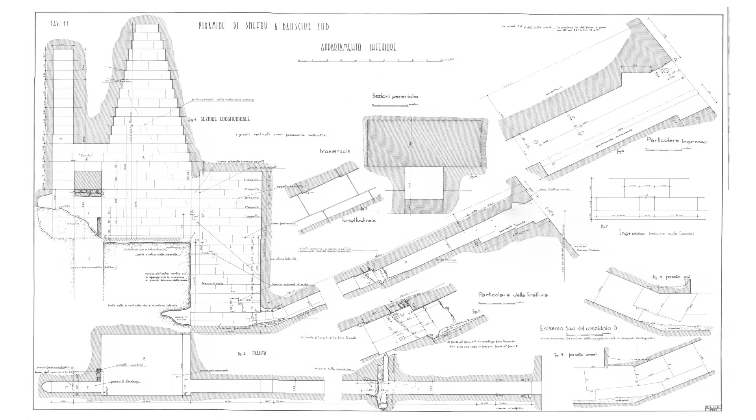Dear friends, so far I've released 5 videos dedicated to the construction of the Egyptian pyramids. In them, I've tried not only to draw your attention to the various interesting details of these ancient structures, but also to provide a rational explanation for them. Because in my opinion, all these details and nuances are important clues that can help us understand the logic of the ancient Egyptian builders.

At the same time, I believe that many researchers repeatedly make a very serious methodological error. They assume that the pyramid's strange internal structure and its elements can be explained in terms of symbolism or the religious beliefs of the ancient Egyptians. After all, once you allow yourself to attribute everything to religion and cults, you lose the opportunity to understand the true meaning of all these very unusual architectural solutions we see inside and outside the pyramids.

And in this video, I'll show you how much we can understand if we temporarily remove all these religious and symbolic meanings from our considerations, if we choose the rationality of the ancient builders as the starting point for our reasoning. This is very important because I am convinced that there could only be one logic that would have allowed all these enormous structures to be built. This is rational logic, based on centuries of experience, pragmatism, and the outstanding skill of the ancient builders. And stories about the flight of the pharaoh's soul to the stars have nothing to do with this logic.

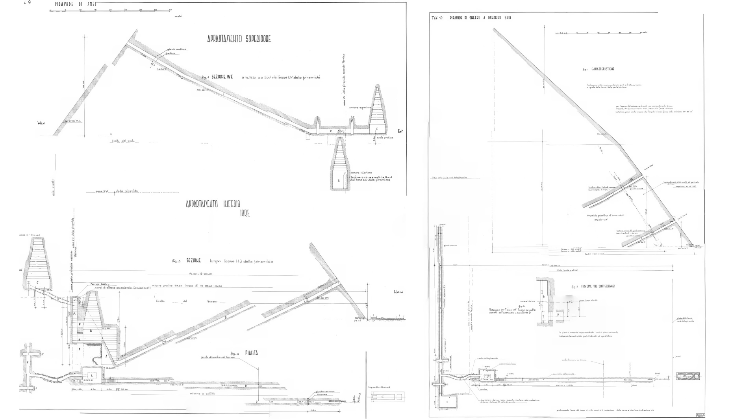But if this is true, then what is the real reason for this strange internal layout of the Egyptian pyramids, the likes of which you will find nowhere else? What motivated the ancient architects when they created such incomprehensible structures? What was the secret of the ancient builders that allowed them to go from the first step pyramid to the Great Pyramid of Khufu in just 100 years? I believe I know the right answer, and it's a perfectly rational one.

It's the method of lifting blocks. It's this method that made the pyramids what we know them as, and it's the reason for most of the strange regularities we observe in their internal structure. And what is very important, this can be proven. Because, unlike the illusory world of religious meanings and elusive interpretations, we have precise measurements, formal logic, physics, and mathematics at our disposal.

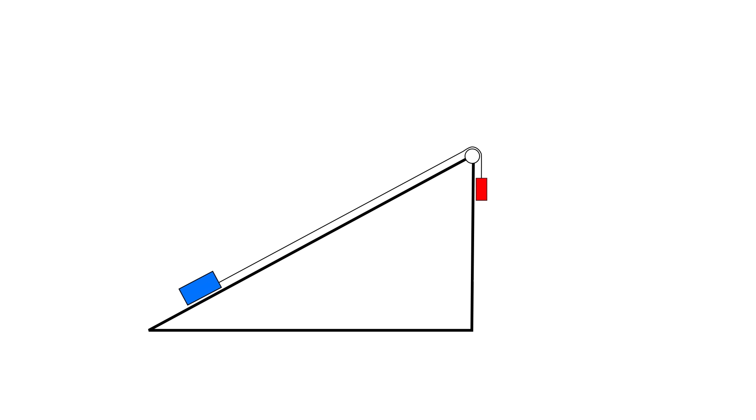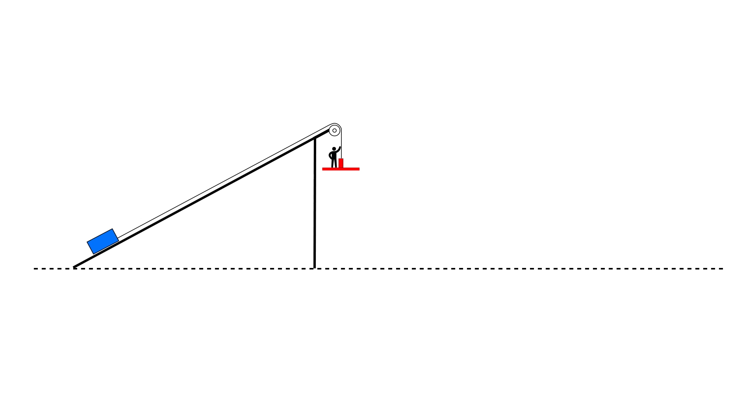As I mentioned in this video, there are many details inside and outside the pyramids that indicate their builders used the same basic principle for lifting building materials. Blocks were raised by lowering a counterweight. Moreover, what is very important is that people acted as this counterweight, since people are the only counterweight that can quickly rise back up on its own. It's a very simple and yet highly productive method, and to use it, you need 2 things: a large enough space for the platform to descend vertically and a ramp or staircase for people to climb back up.

And those who have had even the slightest interest in the Egyptian pyramids will immediately see something very familiar in this diagram. Indeed, this idea instantly provides a rational explanation for all those enormous pits we see on the sites of unfinished and dismantled pyramids. I'm sure these pits weren't created for religious reasons or simply to construct burial chambers. They played a vital role in the pyramid construction process. Platforms with counterweights were lowered into them, and the people who acted as this counterweight then walked up the ramp.

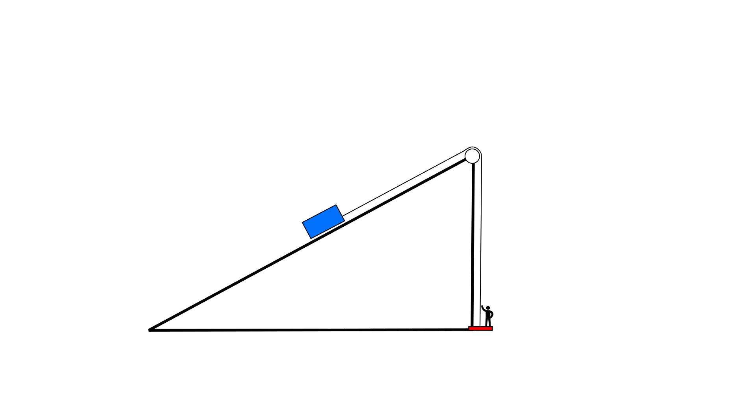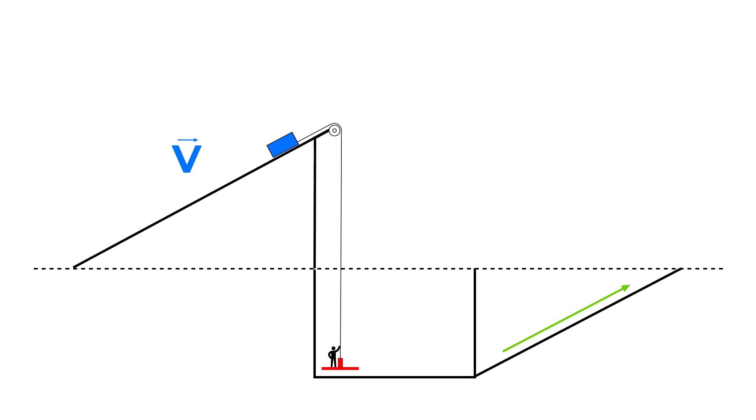We will not now dwell on the technical aspects of this method, which, incidentally, is still used in industrial mountaineering. This is a topic for a separate, serious discussion. However, I'd like to immediately highlight 2 of its main advantages. Firstly, it allows for a constant force to be applied throughout the entire lift, unlike any manual push-pull method, which is extremely important in terms of wear and tear on the ropes, of which a huge number were required. Second, this method allows for much greater load movement speeds than a manual winch. After all, lifting speed was critical for the construction of the Great Pyramids, which required moving millions of tons of blocks upward.

And this video will be the first in a series of videos in which we will explore in detail how this method was used by ancient builders, how it developed as the pyramids grew in size, and why it essentially determined the entire configuration of their internal structure. But first, it is very important for us to understand how this block lifting technology came about and how widely it was used by builders to solve various problems. You'll see now that this method will help us explain much not only inside the pyramids, but also around them, and that objects familiar to everyone from school may actually have a meaning quite different from what's commonly attributed to them.

Saqqara, the famous pyramid of Djoser, designed by the great Imhotep. This step pyramid is the first of the Egyptian pyramids. Beneath it, there is a huge shaft almost 30 meters deep, and the purpose of this shaft has long been a subject of debate among many renowned Egyptologists.

The main question, of course, is why was it left empty instead of filled with blocks? We see nothing similar in the subsequent pyramids. There's even a theory that it was cleared out many centuries after the pyramid's construction, which seems extremely unlikely to me given the volume of the shaft, which is several thousand cubic meters, and the main staircase is completely blocked.

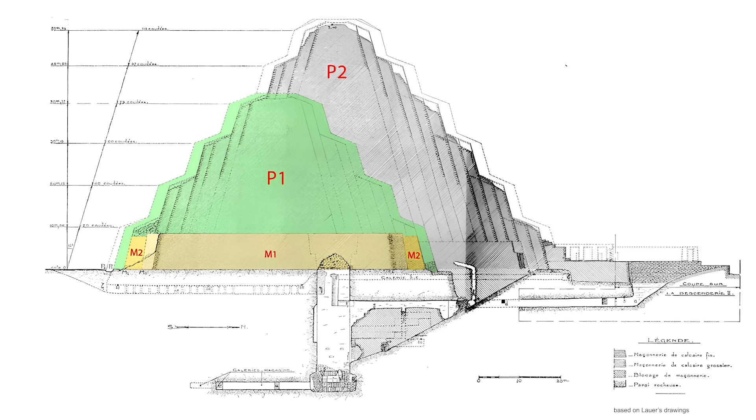Furthermore, researchers are completely baffled as to why the pyramid's creators didn't leave a layer of rock above the shaft, as shown in Keith Hamilton's drawing. This would have been much simpler in terms of the stability of the entire structure above. Instead, the shaft extended upward and passed through the central superstructure, as seen in this diagram.

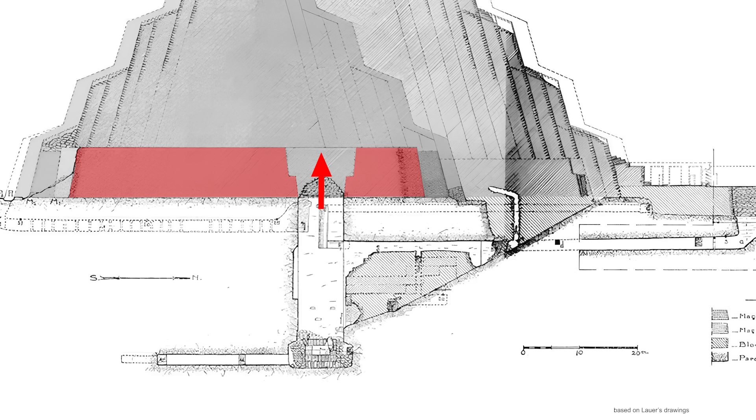And it's very important that the proposed version of the block lifting process, in which a platform carrying people is used as a counterweight, may provide answers to all these questions. This shaft does not yet have the classic form of the pits created for pyramids during the 4th Dynasty, but all the necessary attributes are present: a large, deep space for lowering platforms carrying people and an inclined staircase leading from the shaft to the base of the pyramid.

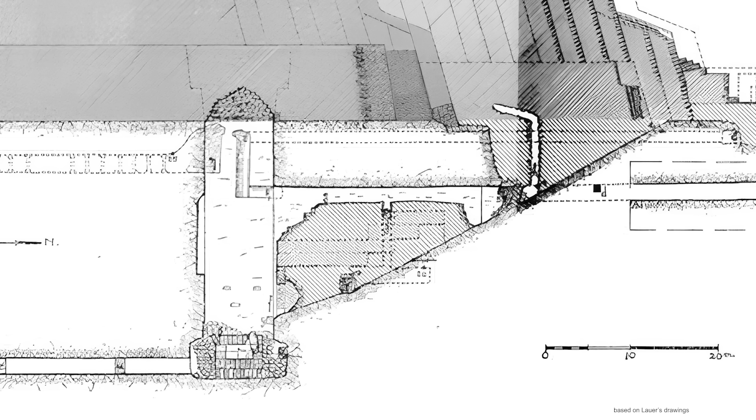Workers could use this staircase to ascend back to the surface, thus repeating this cycle of descent and ascent again and again. In the future, the place of such a staircase will be taken by inclined corridors, which will become a true calling card of the Great Pyramids. Instead of a shaft, pits with inclined ramps will be created, along which these corridors will be laid. And we will certainly analyze in detail this development, which began with the construction of the first pyramid.

But first, we need to understand the origins of this technology. We need to trace its use not only after the Djoser pyramid, but also before it. Because such a method of lifting blocks could not have arisen suddenly, but had to develop gradually over a long period of time.

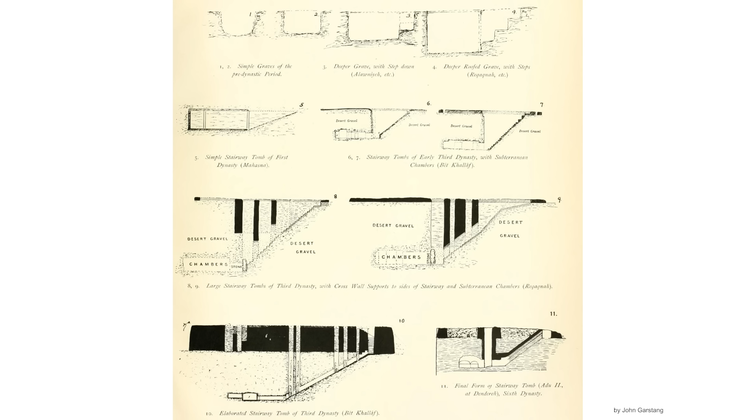In the book by the English archaeologist John Garstang, Tombs of the Third Egyptian Dynasty, the author very clearly shows the evolution of ancient Egyptian tombs and their stair sections. You'll agree that all these diagrams clearly parallel the system created beneath the pyramid of Djoser. Everywhere there is space for a vertical descent of a platform with people and an inclined passage back to the surface. Tombs in ancient Egypt were built over many centuries, both before and after the pyramid of Djoser.

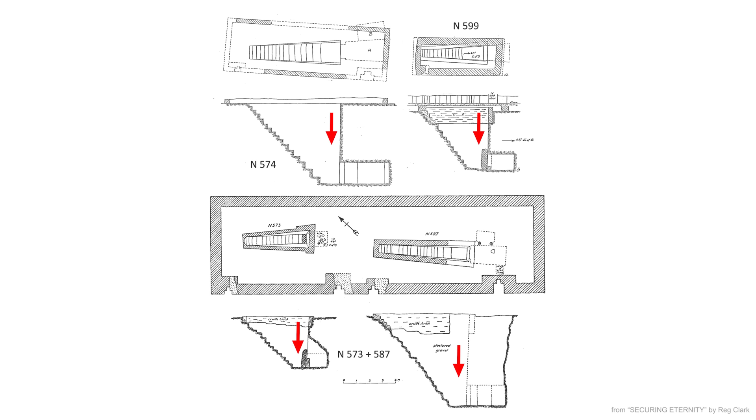The technology of their construction gradually changed. Their sizes and the materials from which they were made changed. The location of the burial chamber also changed, but the only thing that remained constant was the presence of a vertical descent from the highest point of the mastaba downwards. The configuration of the internal structure itself, however, could vary greatly. The vertical descent could lead directly into the burial chamber.

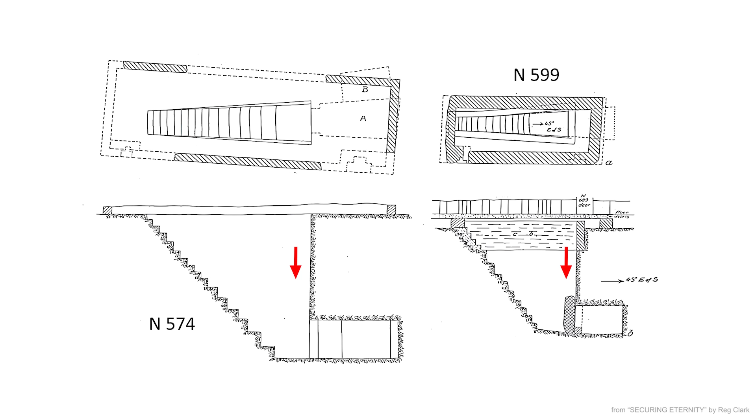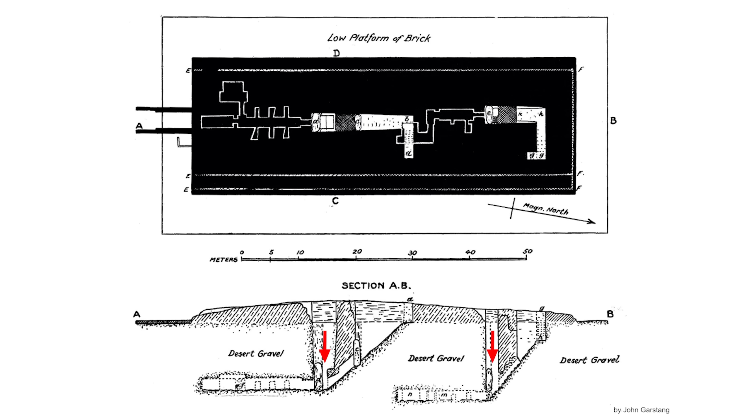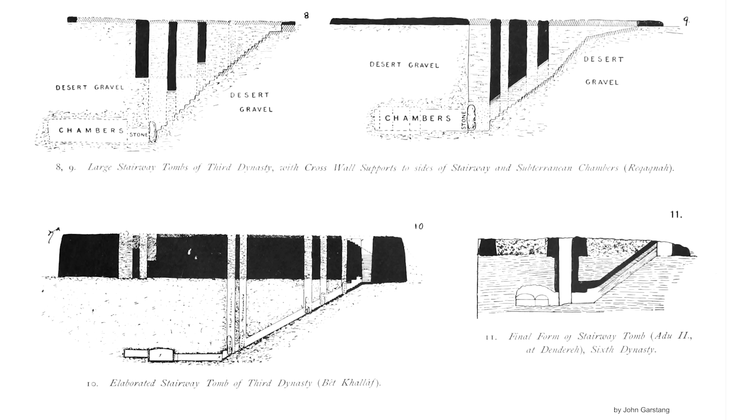Later, the burial chamber began to be created in a separate room, carved into bedrock or solid ground. But the vertical descent remained. The staircase's configuration varied. It could be very complex, with several turns, but the vertical shaft was always present. And in the large mastabas of the Third Dynasty, there could be 3 or even 5 of these shafts. And note that they always passed through the above-ground part of the tomb and did not end at ground level, just like the central shaft in Djoser's pyramid.

And when, at the turn of the 3rd and 4th dynasties, the inclined passages with stairs in the tombs disappeared, these vertical shafts remained. And John Garstang writes of them as follows: the shaft leading directly down to the bottom of the passage, which seems always to have been found indispensable.

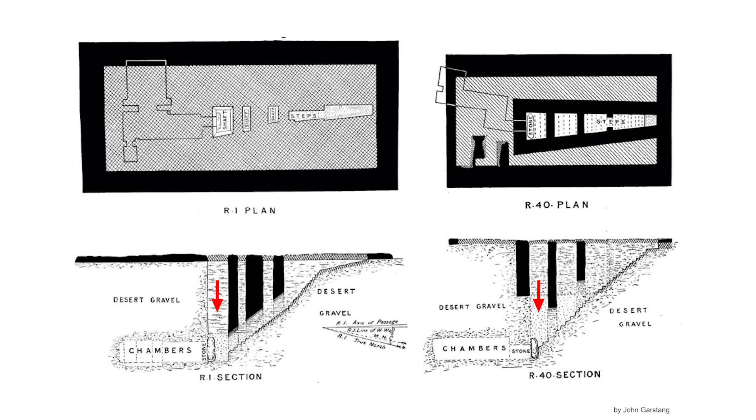That is, he understood that it served some important function, since it was an obligatory attribute of all tombs without exception, but he didn't quite understand what it was. In general, such shafts with a square or nearly square cross-section are a true calling card of ancient Egypt. Their total number is measured in the thousands, and as we will soon see, the ancient Egyptians' love for them was most likely not limited to funerary traditions.

In addition, it's important to pay attention to inclined staircases. Let's take as an example the huge tomb of King Neterket in the area of Beit Khallâf, also known as Mastaba K1. Its base measures 85 by 45 meters, and its height is approximately 10 meters. Why was this narrow, inclined staircase needed here at all, first passing through the mud brick masonry and then descending another 15 meters below the surface?

It's believed the body was carried along it during burial. But wouldn't it have been simpler to lower it into the central vertical shaft and avoid the need for any staircases, as was done a little later during the Fourth Dynasty? John Garstang writes, the primary motive for this remarkable design was the safety of the burial chamber. This suggests that all these vertical shafts served as security features, as we see locking stones at the bottom of each one.

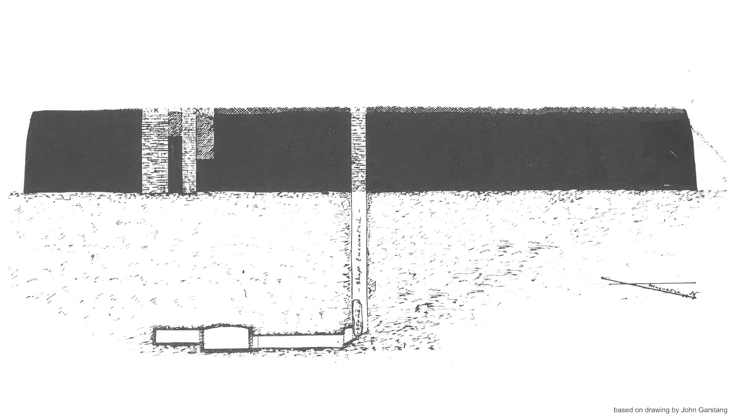Some of you may think that lowering something into a deep shaft might not have been very convenient for the creators of these tombs. I assure you, this is not the case. Firstly, very soon, at the turn of the Third and Fourth Dynasties, the staircases in the mastabas would disappear, leaving only these vertical shafts. Secondly, after construction was completed, they would lower stones like these, weighing from 3 to 6 tons, and sometimes even more than 10 tons. So lowering a body into them for burial would have been no problem at all.

Moreover, in Mastaba K1, the ground there was quite hard, and it was relatively easy to create a staircase by digging a tunnel. In other tombs, it was necessary to dig a pit, build additional internal brick walls to prevent the soil from collapsing inward, and cover the staircase with an arched vault. Here's an example of tomb R40. Most of the stairway ceilings have collapsed, allowing us to estimate the volume of the excavated pit.

Here's tomb R1, even larger than R40. Here you can clearly see the vertical shafts that pass through the above-ground part. Can you imagine the volume of this work? First, dig a trench, then fill it with bricks, creating a tunnel underneath. And all this just to carry a body through once? It certainly wouldn't have been worth building such a massive structure.

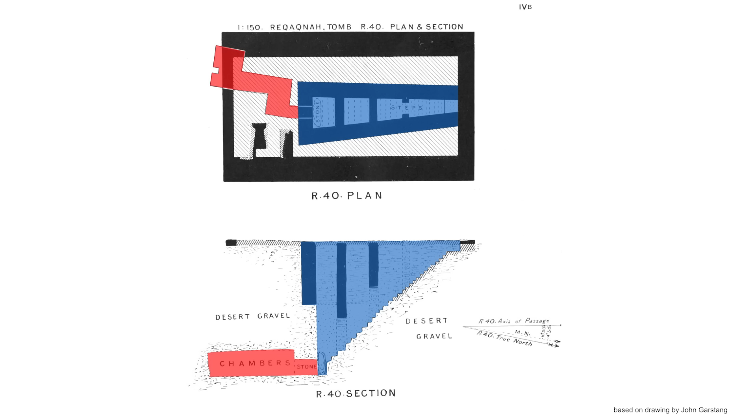You might counter this by saying that such a staircase could have been used to excavate the burial chamber itself. But the point is that the volume of earth removed to create this staircase is several times greater than the volume of the main chambers, which makes such an assumption clearly illogical. Therefore, I believe that the presence of such a structure can only mean one thing. This staircase was actively used by builders after construction of the above-ground part of the tomb began.

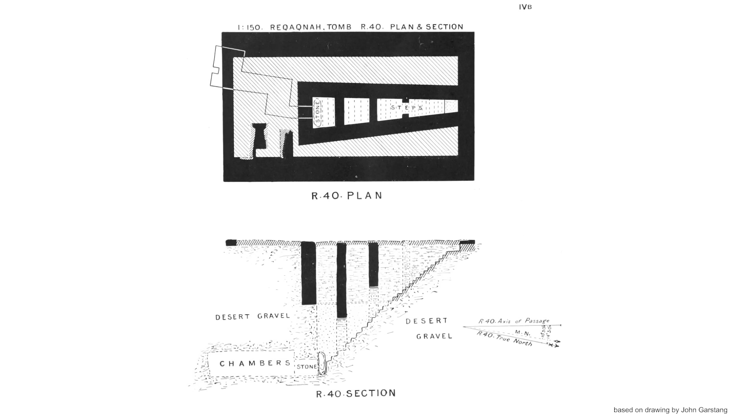Moreover, look at the condition of the staircase itself. It doesn't look like it was used to carry the body of the deceased only once. The level of wear on the steps clearly indicates that a large number of people have passed through here. And the idea that these vertical shafts and staircases were used to lift building material explains it all. If this idea is correct, then these staircases were needed so that workers who had descended the shaft could climb back up to the surface.

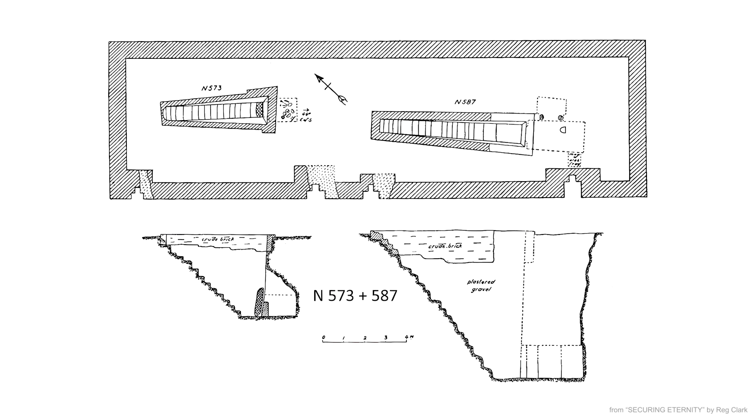And, accordingly, it's understandable why they were so securely constructed and reinforced. After all, thousands of people used them to ascend. At the same time, using such a simple method was extremely rational. If you're already digging a hole in the ground, why not put it to good use? The gravel and mud bricks used as building material for these mastabas certainly weren't multi-ton blocks, but their combined weight wasn't much less.

The total weight of the building material for the K1 mastaba in Beit Khallâf is estimated at tens of thousands of tons, and hauling it all up by hand would clearly have been no easy task. But after the mastaba was built, these shafts could indeed have been used as a means of protection against robbers by lowering locking stones down and covering them with gravel on top.

So in my opinion, this defensive version of the shaft's purpose, currently generally accepted among Egyptologists and described in great detail in Reg Clark's book Securing Eternity, is partly correct, but it doesn't truly reflect their primary function.

But here you can rightly object, saying that perhaps this all sounds logical, but it can only be indirect confirmation, but not direct proof of the hypothesis in question. And that something much more substantial is needed to confirm this hypothesis. I completely agree with you. So I spent a considerable amount of time trying to figure out what such proof could be.

And as often happens in such cases, it turned out that the simplest and most obvious answer was right there in plain sight all along. And perhaps that's precisely why no one noticed it. Let's imagine for a moment that the idea I've proposed is correct, and people actually descended these shafts as counterweights. Then, how would the load being lifted have moved?

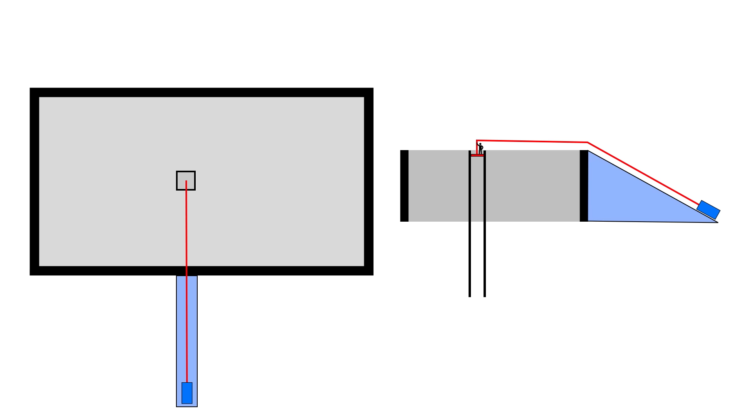Purely theoretically, it's possible to imagine such a scenario. But then we'd have to build an additional ramp and use excessively long ropes. And a huge number of such ropes would have been required. So taking all this into account, what would the optimal design have looked like?

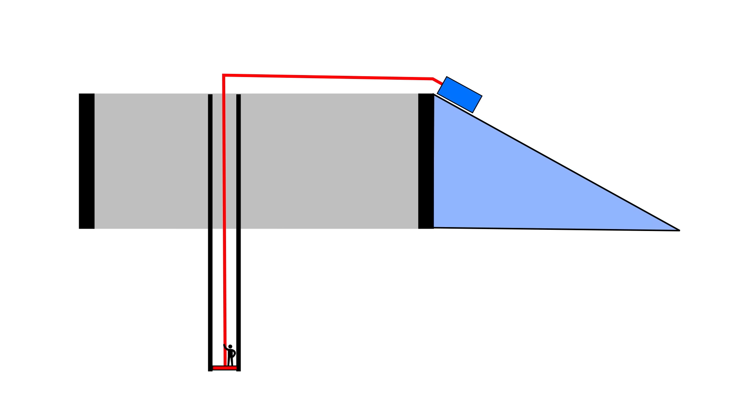Like this. These mastabas were built using thick brick walls built around the perimeter, with gravel and sand poured inside. It's logical to assume that some part of the wall could have been missing, and a sand ramp leading from below to the shaft. Fine. And we're looking at the final stage of construction. But what should have been at the beginning?

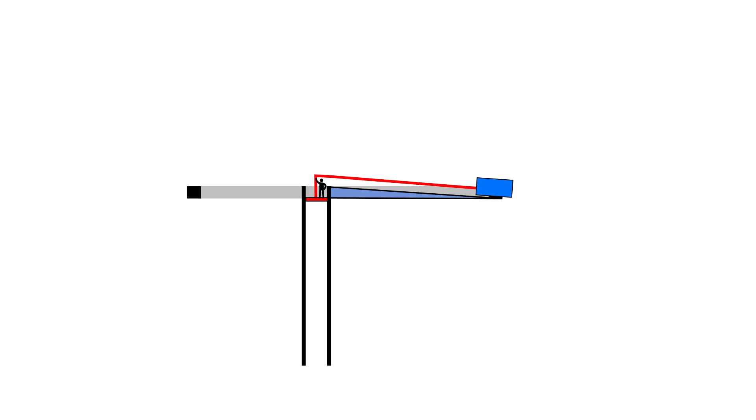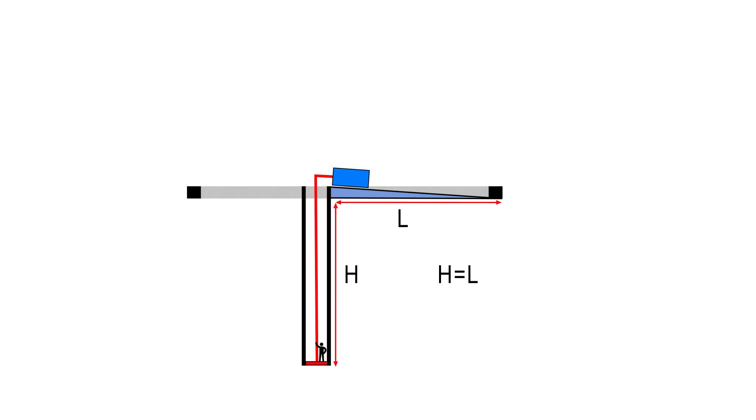And at the beginning of the creation of the above-ground part of the tomb in this version, the inclined ramp went almost horizontally from the edge of the mastaba. That is, the distance from the edge of the mastaba to the shaft should have been equal to the depth of the shaft's underground section. If this is true, then as we increase the building level, we will always have enough shaft depth to lift the load. Now let's look at mastaba K1.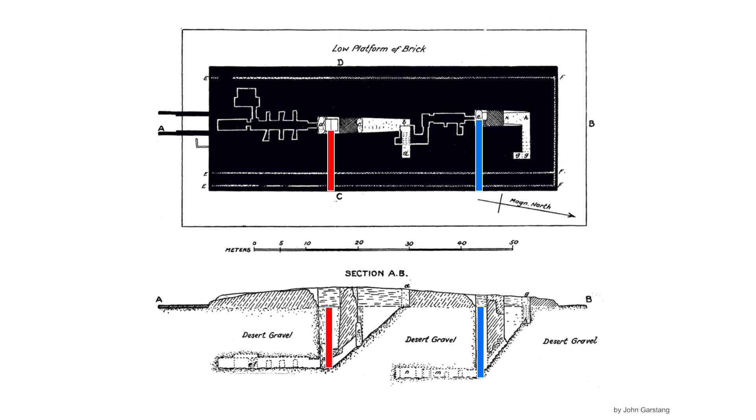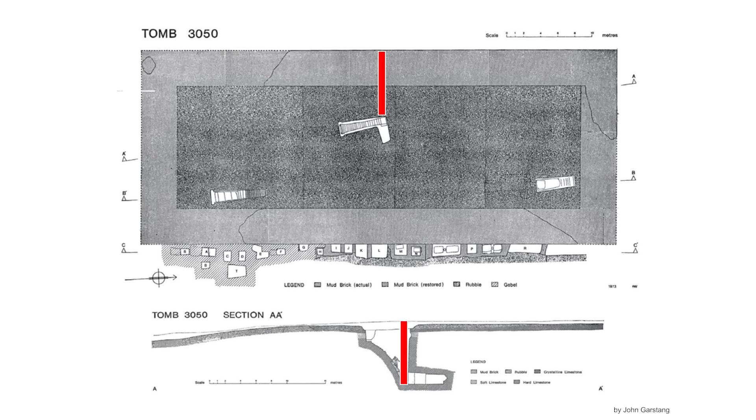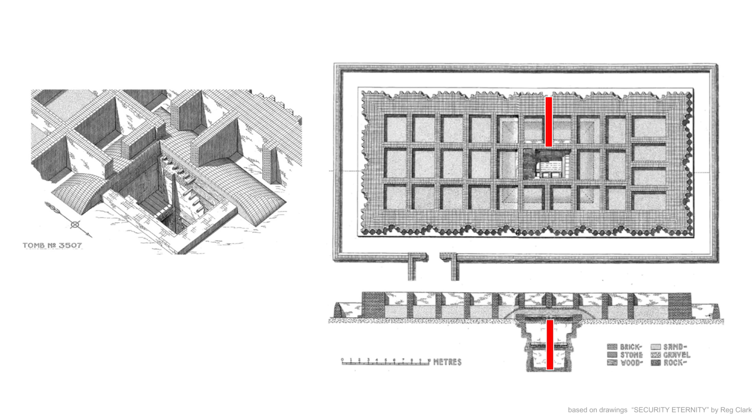This is mastaba K2 in the same Beit Khallâf, mastaba K3 and K4, mastaba K5, the so-called Covington's tomb on the Giza plateau, tomb 3050 in Saqqara, tomb 287 in Helwan, tomb 33 in Abu Sir, tomb 9 in the tomb of Netjer-aperef in Dahshur. Moreover, apparently, a similar method was used since the time of the First Dynasty. Here are the tombs in Saqqara from that period. Despite the completely different design, the principle of equal shaft depth and distance to the edge is observed.

Now let's move on to the Giza plateau. Next to the Khufu pyramid is the necropolis. This is its eastern part. The mastabas here are mostly double and arranged in even rows. The width of most mastabas is standard, about 20 meters. What do you think the depth of the shafts is? That's right, from 8 to 10 meters. And this list can go on and on.

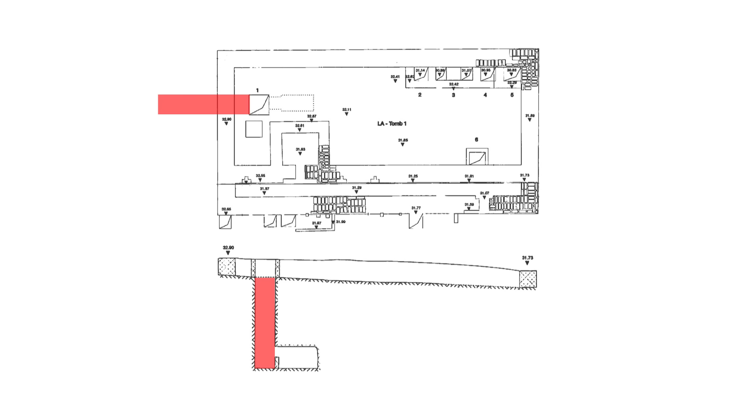Sometimes the shaft's depth is greater than the distance to the edge. This could be explained by the ramp extending not toward the near side, but toward the opposite one. Or perhaps it originally extended beyond the perimeter. But the main thing is that of the dozens of tombs whose plans I was able to examine, I haven't found a single one in which the shaft's depth was significantly less than the distance to the edge, which can't possibly be a coincidence.

I don't know if the facts presented here can be considered absolute proof of the hypothesis put forward, but I now have no doubt that these shafts were directly related to the construction process. I believe that the correlation between the shaft's depth and their distance from the edge of the mastaba cannot be explained otherwise.

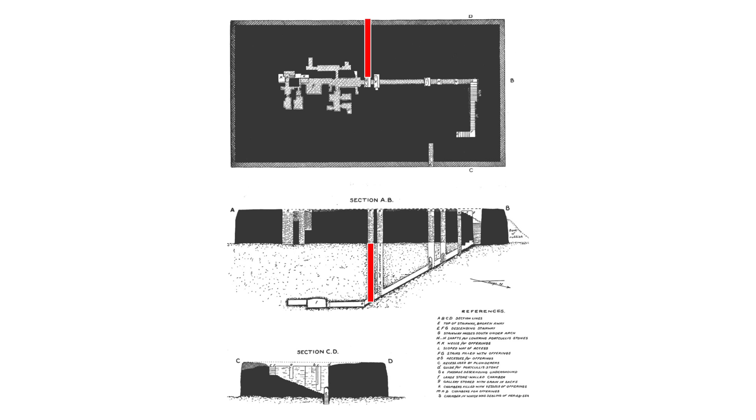Now let's consider another aspect. Most mastabas at the Giza necropolis have not one shaft on each side, but two. The second shaft is often significantly shallower. Furthermore, while the main shaft always has a burial space at the bottom, the smaller shafts either lack this space or have only a very small one. How can this be explained?

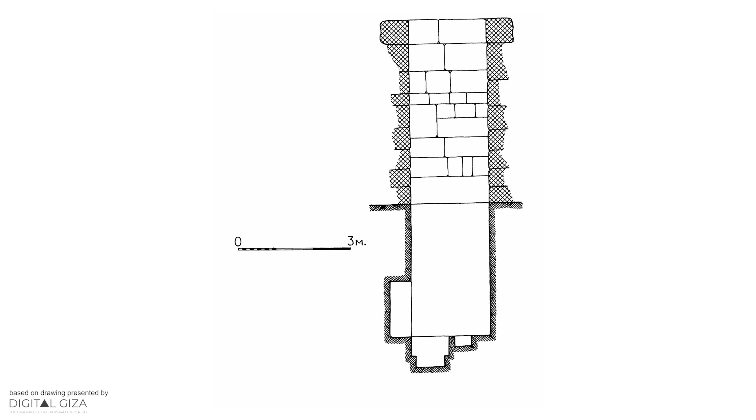I think when people were descending into the deep main shaft as a counterweight, they had to first get off the platform so that it could rise up. Then, presumably, a ladder was lowered down so they could ascend themselves. And since this shaft was used to lift building materials, such an operation would have required at least several people. Consequently, there had to be ample space below.

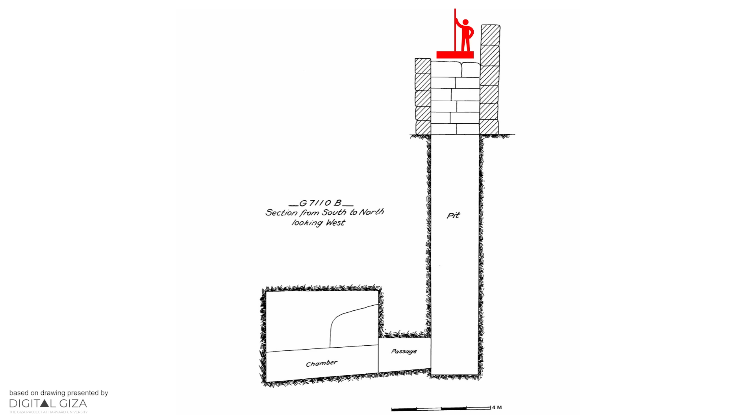The second shaft, however, helped move the lifted load. This could likely be accomplished with just one worker, and a large niche below wasn't required. Furthermore, this method had one natural limitation. It wasn't possible to stop the iteration halfway. Once you boarded this platform, you had to ride it to the final stop, as there was nowhere to exit midway through the shaft. This didn't pose any problems when lifting the load, as the shaft's current depth was always equal to the ramp's length.

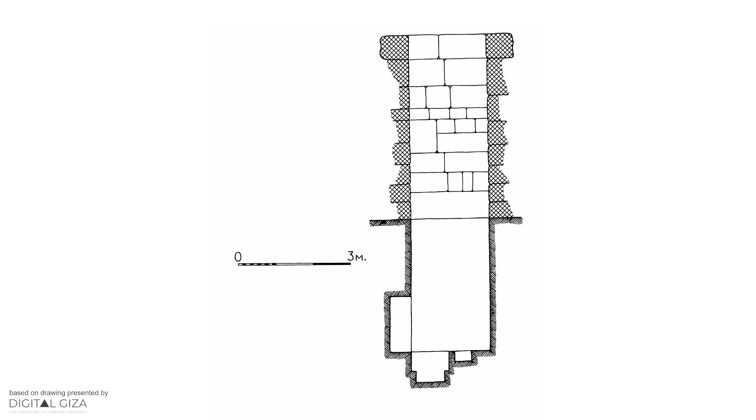But it was necessary to move it further at different distances, and presumably this made it easier to move the load in several steps, but still get it to the desired destination. Therefore, the second shaft's depth is much shallower. Let's return to the stairway tombs. The same logic applies to them. It immediately becomes clear why a central shaft was always necessary and why it was usually larger than all the others. After all, it was used for lifting loads.

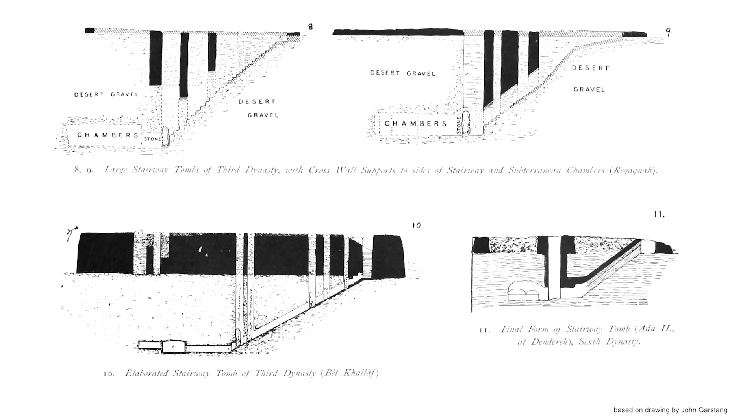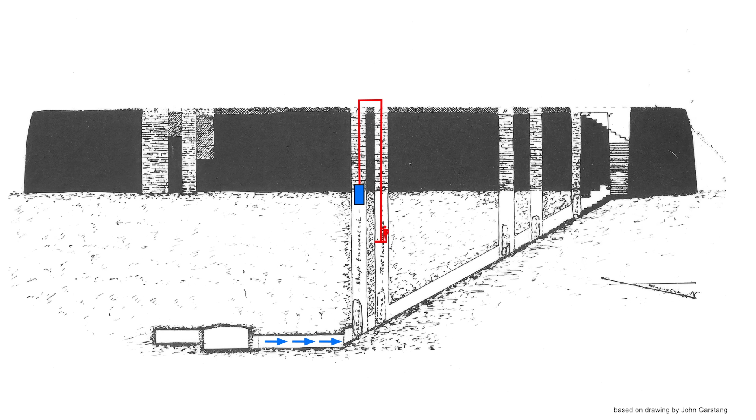But here's what's interesting. In Mastaba K1, there are two central shafts, and they are located very close to each other. The second shaft, of course, could also have been used for lifting, just like the first. But I think their placement is not solely related to this. Together, they could have lifted the rock left over from excavating the burial chambers. I believe it was this technique that allowed the builders to create a very extensive system of chambers in these tombs. And after the staircases disappeared, leaving only a single shaft without additional ones, even in the large mastabas of Giza, the volume of the interior spaces was sharply reduced.

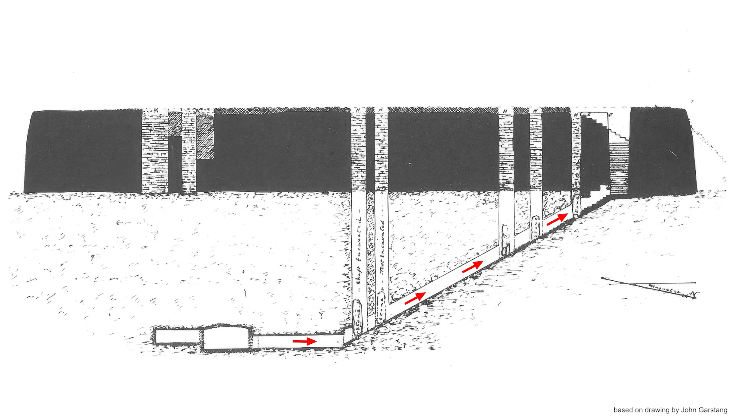You might think, then, that the earth could have been lifted up not through the shaft, but through the staircase itself. But I think this would be incorrect, because to organize the lifting of anything up these stairs to the surface, constant two-way traffic is required. People have to ascend and descend, and these staircases are very narrow, just like the inclined corridors in the pyramids. It's impossible to ascend and descend them simultaneously. They were clearly designed for one-way traffic.

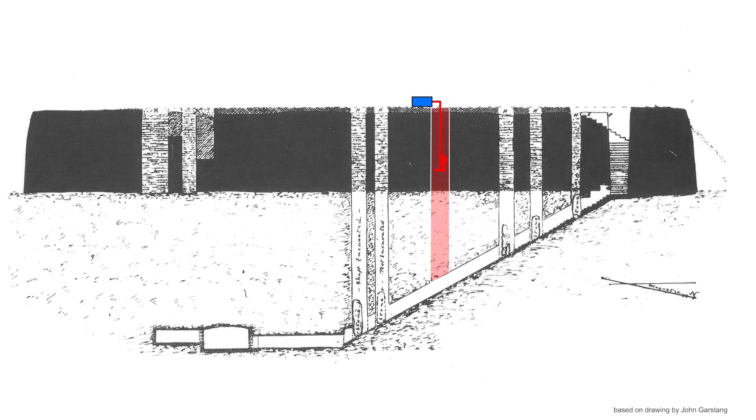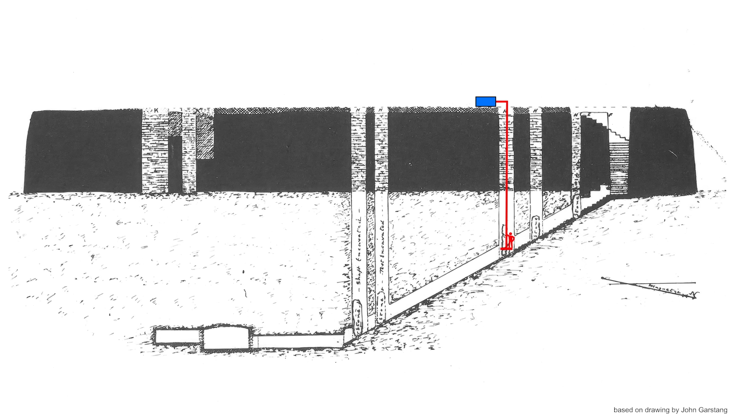Now let's look at the side shafts. I think these shafts were needed to move building materials. There's an interesting nuance here too. Note the large distance between the second and third shafts. If it were any smaller, the counterweight platform simply wouldn't reach the bottom of the shaft when moving the load. Consequently, the system wouldn't work. That's why the distance between the shafts was chosen to be equal to the full depth of the third shaft. This made it possible to move the load at all stages of construction of the above-ground part of the tomb.

In addition, on the other side of the stairs, there were often shallower shafts. It is believed that they were specifically created above the burial chambers and intended for offerings to the deceased. And I won't even dispute this. However, I believe that during the construction of the mastaba, they also helped move building materials, but in a different direction from the central shafts.

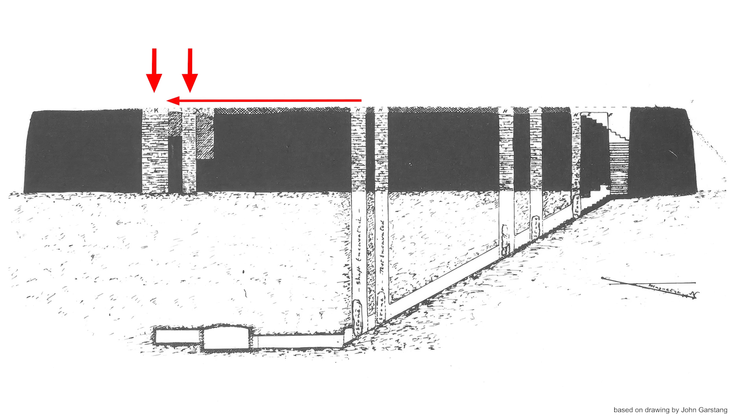Again, an interesting detail can be noted here. The maximum length of ropes used during the construction of the mastaba was apparently equal to the full depth of the central shaft. These smaller shafts were positioned precisely this distance, allowing for the maximum movement of loads toward the edge.

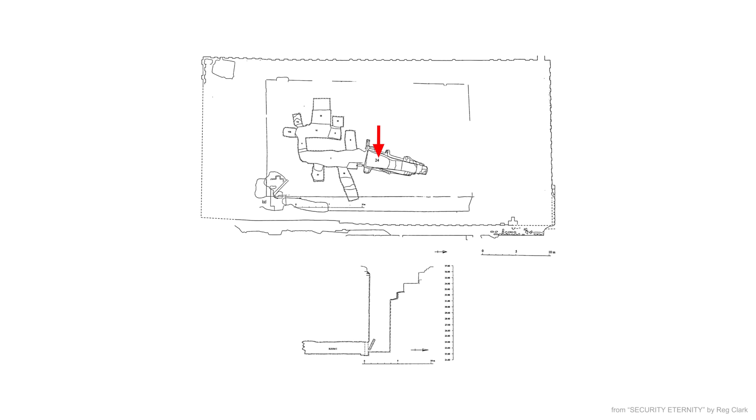In addition to all of the above, the hypothesis under consideration allows us to answer two more fundamental questions that have long been debated by experts. The first question: why are vertical shafts almost never located in the center of mastabas? Egyptologists, of course, attribute this to security measures. Supposedly, the builders hid them from potential robbers.

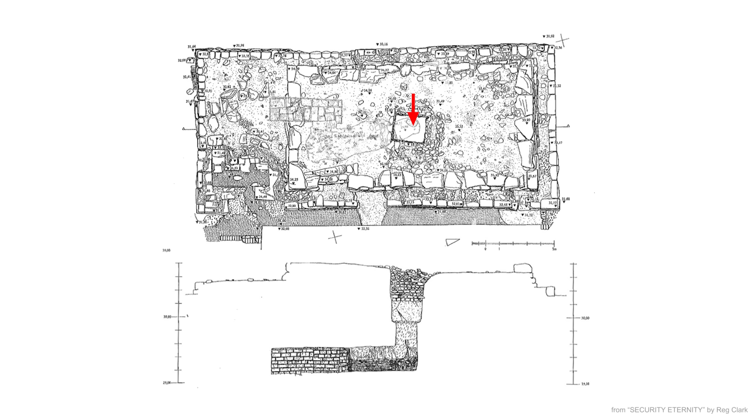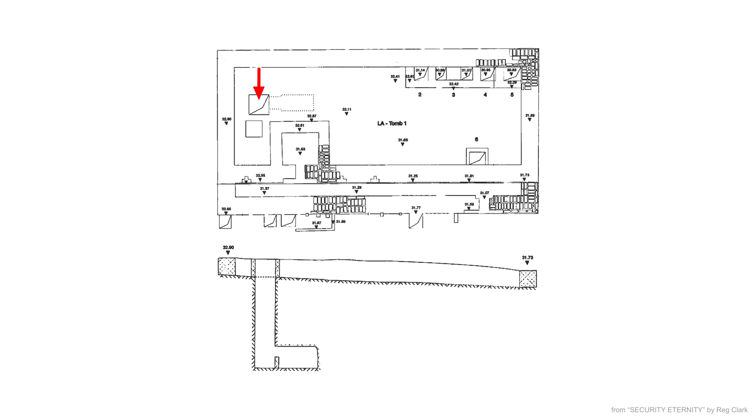I'm no expert, of course, but in my opinion, Egyptologists have greatly overestimated the issue of burial security in ancient Egypt. The security factor has simply become another convenient, universal explanation for any unclear details. And as we've already seen, this strange placement of the shafts is actually explained by entirely different reasons.

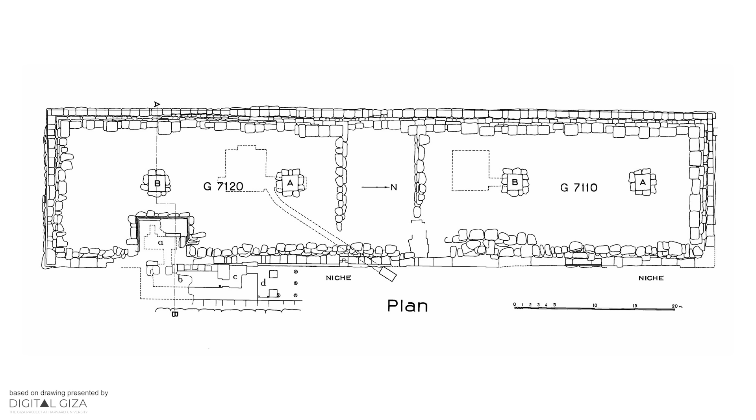The second question: why are mastabas always rectangular and not square? The answer to this, as you already understood, also lies in the technological plane. This shape simply followed from the methods of their construction. More precisely, from the logistics of raising the building materials.

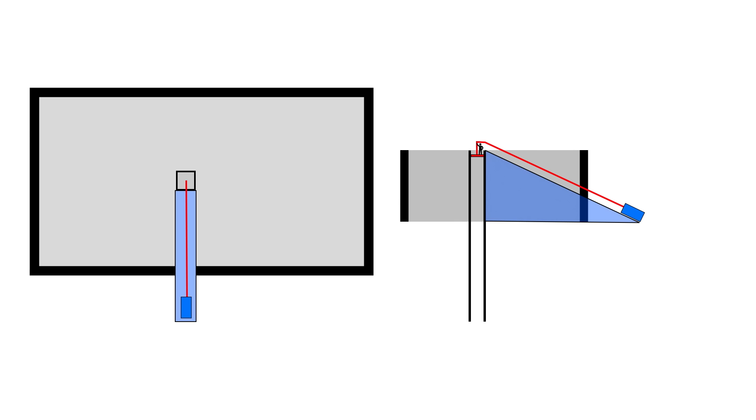Of course, this is only a superficial analysis. The total number of mastabas is simply enormous. Understanding all the details would require considerable time. But I believe you get the basic idea. And I hope you'll agree with me that there are very compelling arguments that this method of raising building materials was used in the construction of all or almost all of the tombs listed.

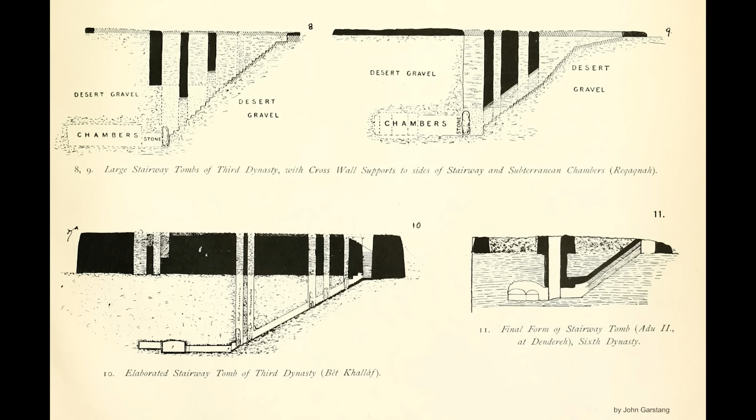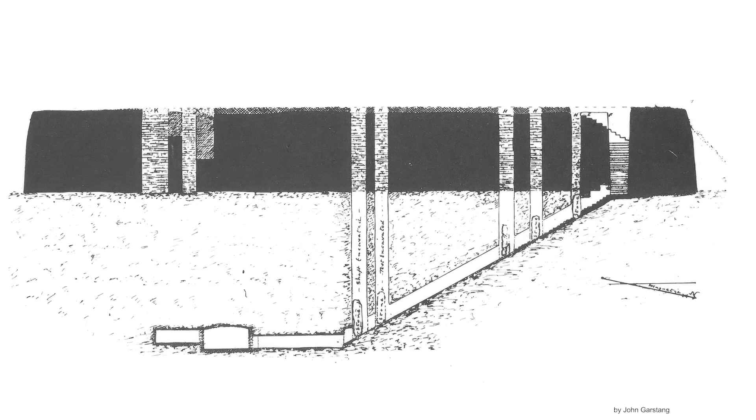At the same time, these staircase tombs of the Third Dynasty are especially important to us now. Since these mastabas were the immediate predecessors of Djoser's pyramid, we can assume that pyramid design and construction methods emerged and developed during their construction. Furthermore, there is no doubt that the internal structure of these tombs, with their inclined staircase, served as a prototype not only for the first pyramid, but also for subsequent pyramids.

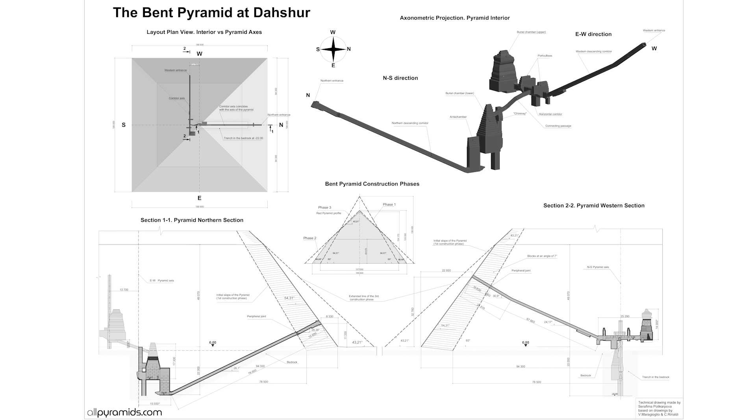In all of them, we see similar long descending staircases and corridors. And what's very characteristic is that, just as in the tombs, more time and effort was obviously spent on creating these staircases and corridors in the pyramids than on constructing the chambers themselves. This suggests that their role was unlikely to be limited to a one-time participation in the funerary ritual.

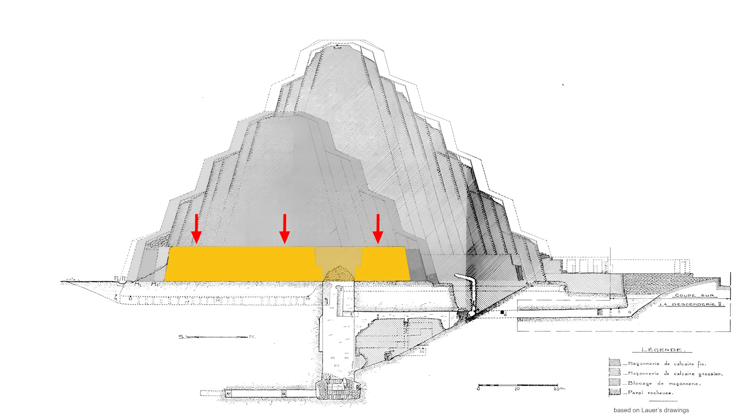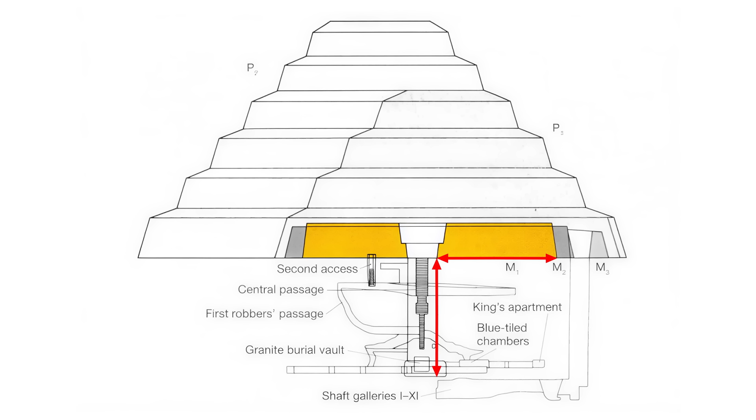Finally, let's return to the shaft beneath Djoser's pyramid. Above it, we also see a mastaba. In this projection, it's offset relative to the shaft, but if you look in the north-south direction, the mastaba is located almost symmetrically relative to the shaft, and we can verify the rule we just discovered. As you can see, it works perfectly in Djoser's pyramid as well. This tells us that the same construction methods and design techniques were used in its construction as in the tombs, and this is very important.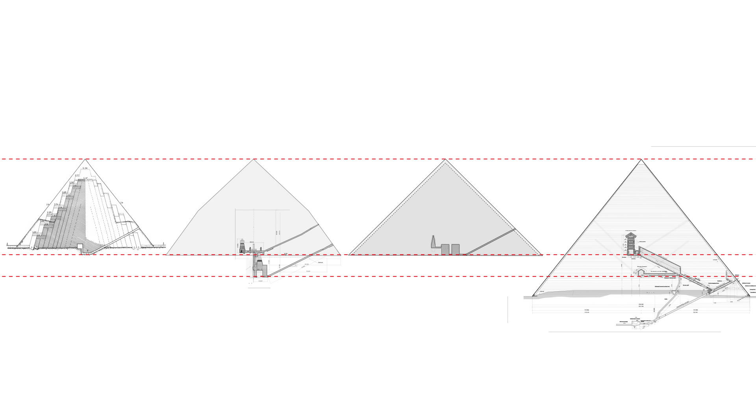In the previous video, I showed how the designs of all the first pyramids are connected. And as you've probably already realized, I'm certain that the reason for this connection is precisely the method of lifting the blocks used in their construction. Now, we've seen that this connecting thread doesn't begin with the first pyramid, but extends back to the earliest dynasties of ancient Egypt.

I wouldn't like to sum things up now. Let us leave the main conclusions until the end of the next part, in which we will examine in detail the shaft of the Djoser pyramid and understand how the principle discussed was applied in the first pyramid and developed further. But in the end, I would like to draw your attention to one point that I think is very important.

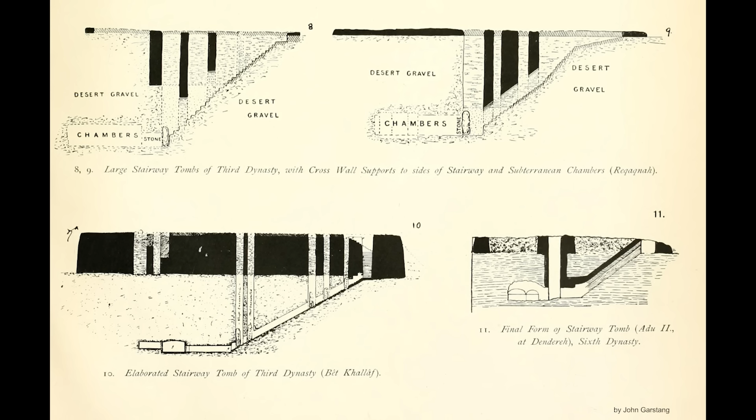Many films and books talk about the ancient Egyptians' architectural and construction genius, which allowed them to build all those enormous pyramids. But what lies behind these generalities? What exactly was this genius? How did their approach to construction differ from everyone else's? I believe it is because the internal structure of their buildings always had a dual purpose, and this is truly a brilliant solution.

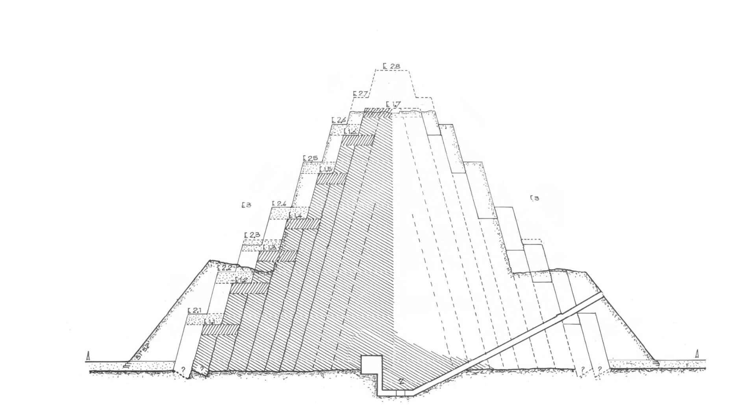On the one hand, all those shafts, staircases, chambers, and corridors could have been used for religious and ritual purposes after the pyramids were built. And this is what is familiar to us. So it's logical that this is precisely what Egyptologists focus on. But on the other hand, these elements were used as construction tools during the pyramid construction process. That's why they have such a strange layout, and that's why so many people see technological meaning in them. And they're right, only this is not the technology of a space lighthouse or a power station of ancient aliens, but a construction technology.